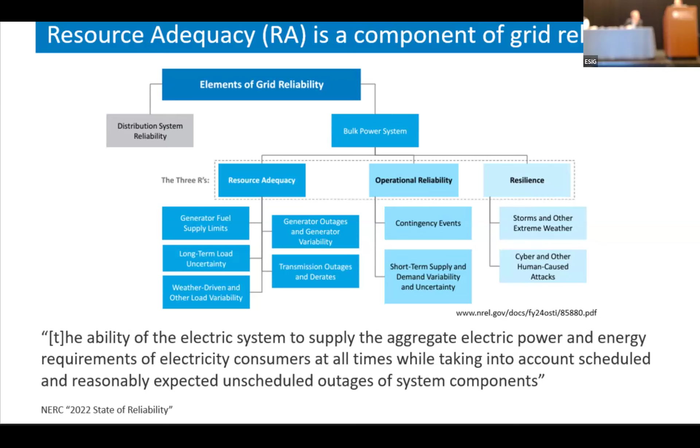So we're talking about resource adequacy. I'm talking about resource adequacy within capacity expansion. I think if you're here, I don't need to go through this. Resource adequacy, obviously an important component of reliability. The key point here is it's the component of reliability that makes the biggest impact, that matters the most within a capacity planning model. I've shown a couple examples here.

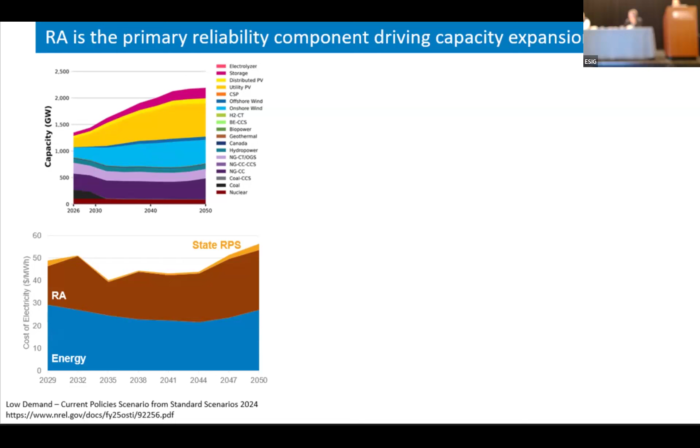But achieving resource adequacy is actually extremely easy. You have a large enough reserve margin, you're resource adequate. But that's not really the challenge. The challenge is that cost reliability trade-off. So how do you have an adequate enough system at lowest cost? That's one of the challenges here that's harder to meet.

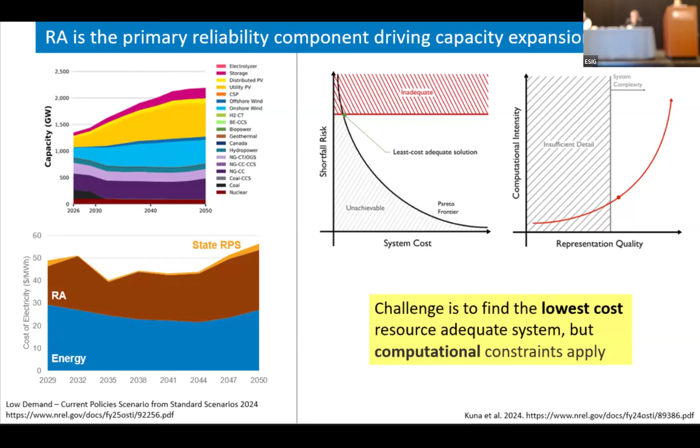The second part is computationally. You can hear from different folks here, I think, that will have their own approaches on how to overcome some of the computational challenges. For us, we're looking at scenarios and modeling for nation scale, multi-region, interconnection-wide. So some of those computational challenges definitely come up here, and we have to figure out ways to overcome them.

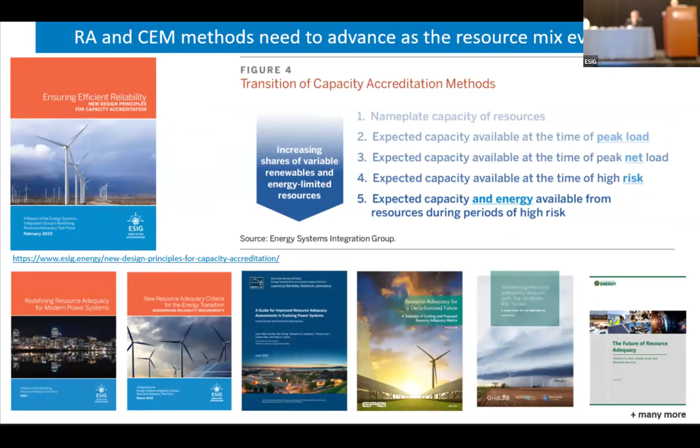As Josh alluded to, many folks have thought about this. Many folks have looked at the resource mix changing, and all these studies from the ESIG task force, from Berkeley Lab, from DOE, EPRI, et cetera. Many folks from this panel are listed here, and many other studies that I haven't shown here are starting to look at this problem. For us, what is the motivation beyond looking at that literature is, how have we done this before, and is it good enough?

And how we've done it before is a traditional capacity credit, having a reserve margin, stacking up your firm capacity after you do your accreditation to see if you meet your adequacy requirement. But what's wrong with that? What's the problem with that? The first is...

When you do your accreditation, there are other sophisticated ways to improve upon this, but essentially the core of it is it's hard to know where that energy will be delivered during times of system stress. So you don't really know if you're comparing your generation profile with your load profile in region or out of region, because you don't know in a future scenario where that energy will be served.

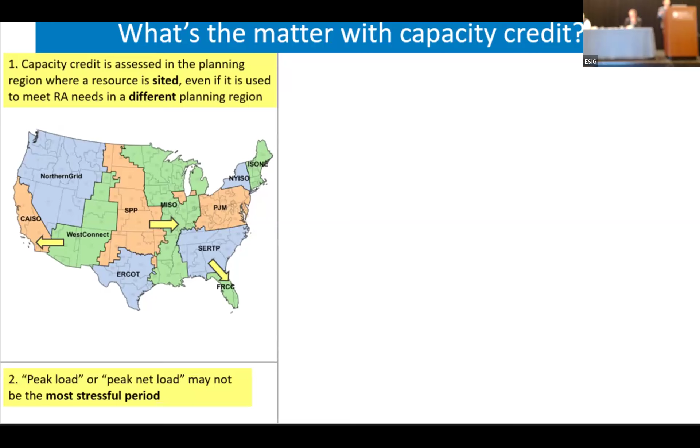Secondly, a lot of these methods use peak load, net peak load, as a proxy for times of system stress. That may not always be the case. It's a good proxy, a reasonable proxy, but it may not always be accurate.

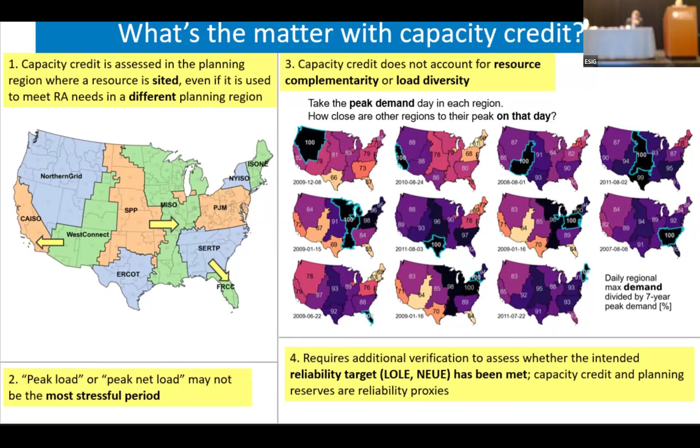And lastly, when you use a reserve margin, that's not directly a reliability target. It's not an LOLE, it's not an expected unserved energy, and therefore you don't really know if you've achieved the adequacy level you intended. Of course you could iterate, change your reserve margin, but in principle, from a capacity planning perspective, the models typically don't have those iterations, so you don't really know for sure.

So what are we proposing here, given those limitations of the traditional method? It's a simple process. I'll go through many slides that walk this through, but essentially the idea is to identify the highest stress periods - let's not use those heuristics of peak load or net peak load. Secondly, let's plan for those days.

When I say plan for those days, use the core of your capacity expansion model, which is optimizing across all the resources in region and out of region to meet those stressful periods. And the third one is check to see if you achieve that adequacy or reliability target, and then you could iterate correspondingly. What does that look like in a fancier flow chart here?

There's no more planning reserve constraint, no more 'hot period, this is your peak load, you got to have enough firm capacity to that.' You just have the stress periods in there.

You design your system, you feed that system to the probabilistic resource adequacy suite model, PRAS, that does your Monte Carlo simulation, does the draws of the different thermal plant outages over a multi-year period to estimate your reliability measures - LOLE, LOLP, EUE.

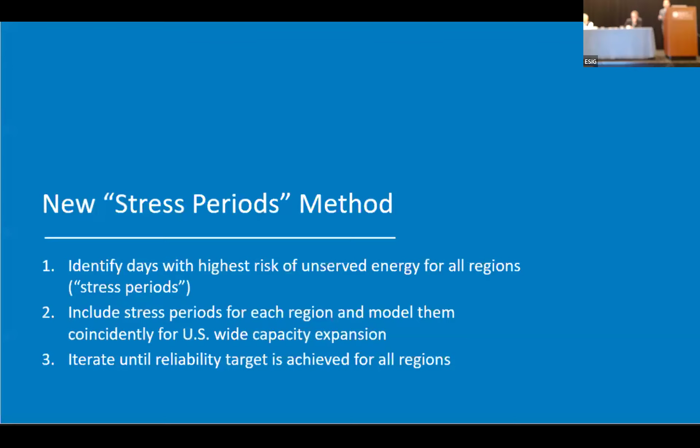Oops, wrong way there - lots of customization.

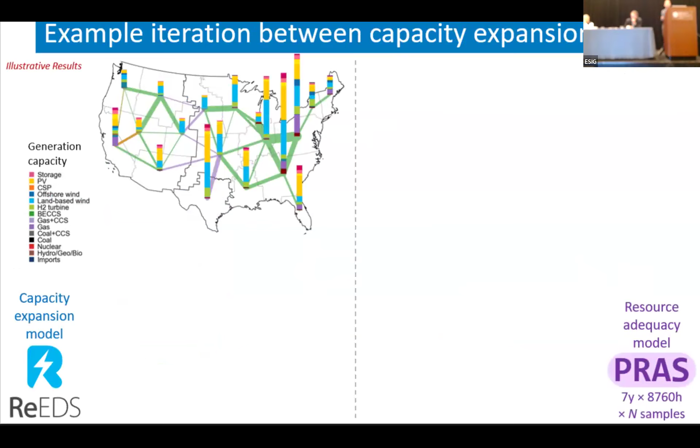So what does that look like? This is the first iteration. You start with your ReEDS, you expand it, you get your capacity.

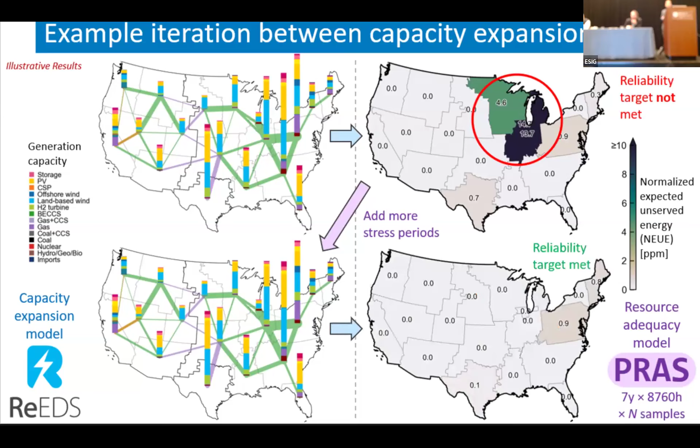You go over to PRAS, you test your reliability target, whether it's met in any particular region. In this particular example, in the northern MISO area, that reliability target was not met. You feed that back in until you find those days with the highest EUE, feed that back into the capacity expansion model, redesign it. Typically that's a light tweak to your portfolio, not a wholesale change of things. Then you test it again. If it's met, you move on. It's a pretty simple process.

Some of the key elements why we believe it's advantageous: you don't know what the sources of stress are a priori. You don't know it depending on your resource mix. A lot of people ask us this when we apply this: how do you know those days are problematic or stressful? In some ways it's totally not satisfying because we shrug our shoulders and say, well, I don't know. But that's kind of the point here, because there are multiple sources of stress.

It could be high demand. It could be changing demand periods over the winter peaks where your solar and your batteries can't resolve the issues. It could be wind droughts, like in this example, multiple days of low wind performance in the Pacific Northwest causing this stress. It could be thermal plant outages, where we model temperature correlated outages, higher outages for nuclear plants during the summer, higher outages for natural gas during the winter, et cetera. It could be a combination of factors, and typically it is a combination working together that's causing that grid stress. As you see in this last panel, the days of stress move over time. The vertical axis is time, and we're really finding those days and planning around them. We don't need a predetermined peak load day to do that.

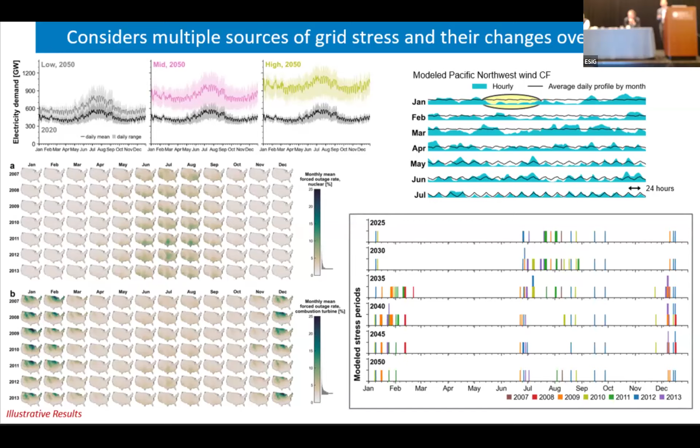Importantly, that's the problem side. What about the solution side? When you put all of this together, the model is used to find all combinations of solutions to meet those stress periods, across all different technologies. So you don't need to assume X% capacity credit for resource Y. It's going to look at the performance of those technologies, dispatch them like any other dispatch, like how you're modeling dispatch normally. That's storage dispatch — it tracks the state of charge, transmission, remote resources. It's all embedded together and optimized together.

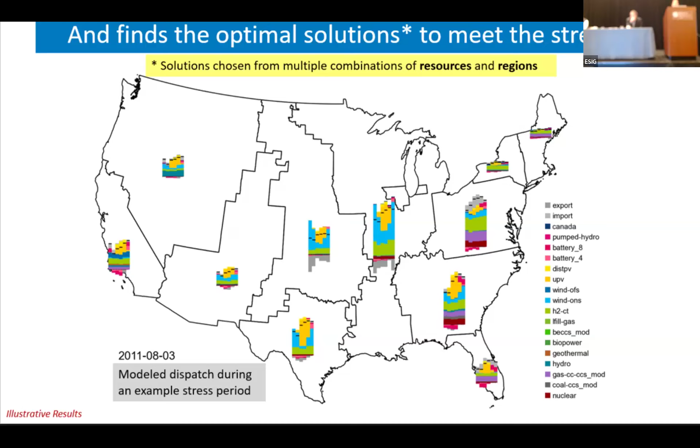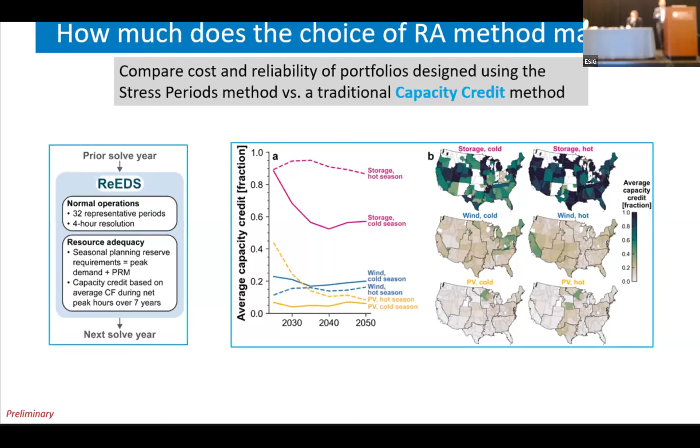Okay, so that's the method. Now we're going to demonstrate, perhaps convincingly, why it matters. We compare what I just described to our traditional method, capacity credit. Just to convince you we didn't cherry pick a poorly formulated capacity credit, you can see some of the lines there with declining capacity credit for wind and solar with increasing generation shares, and capacity credit for storage that's not 100% and declining as well, given the limited duration.

So we have a reasonable representation of capacity credit and planning reserves to compare with. When we model the same scenarios, everything else is the same except for the RA methodology. The capacity credit is in blue, the new stress periods formulation is in red. You get lower system costs by a couple of dollars per megawatt hour, or in another unit, $160 billion in net present value over a 25-year period or so, and you get higher reliability.

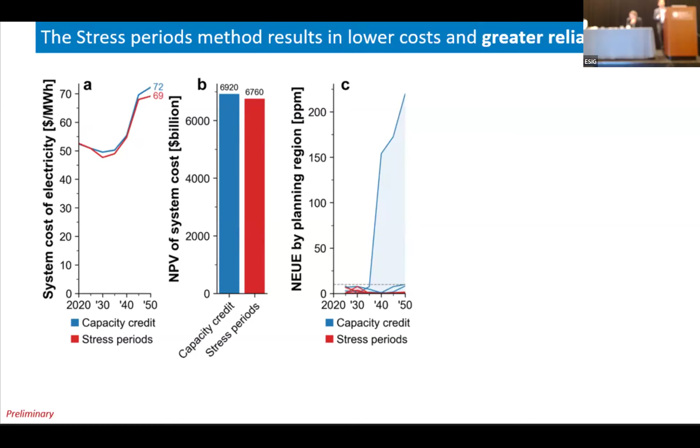This looks at the normalized expected unserved energy. We have a tolerance in our stress period. We don't actually know what the reliability target is in the capacity credit formulation because we did not specify it — it doesn't have a way to specify it. For most regions, in blue, it meets our reliability target, but for certain isolated regions, because we're not exposed to how reliable or unreliable it is, you can have a highly resource inadequate situation, and you wouldn't know it. So it's both lower costs from the stress periods and greater reliability.

And how is this achieved? How is the lower cost achieved? It's by reducing the amount of overbuilds, if you will. There are lots of details in this particular scenario, but we don't need to go into it.

The key thing here is the stack on the right, which is the stress periods, is lower than the stack on the left. So it's a reduction in generation and storage capacity. If you look into the details, most of the reductions are in thermal generation and storage. But in some technologies, you actually get an increase in deployment, so the capacity expansion model sees greater value in that than you otherwise would have.

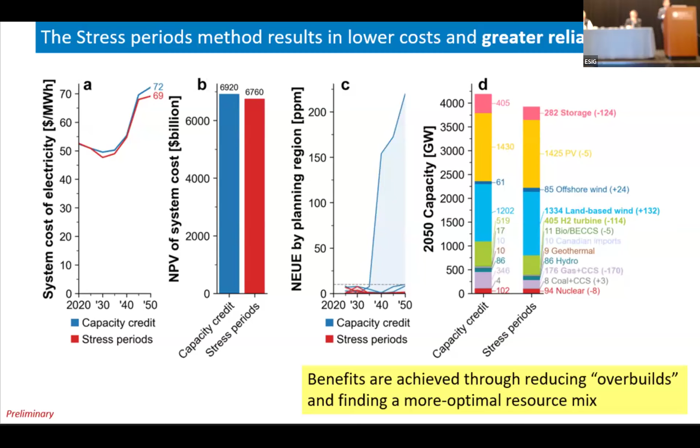That's part of the siting problem I listed earlier, the capacity credit. We misestimated the capacity credit for some resources, in this case wind, for meeting our resource adequacy reserves. And that has a high impact on transmission as well.

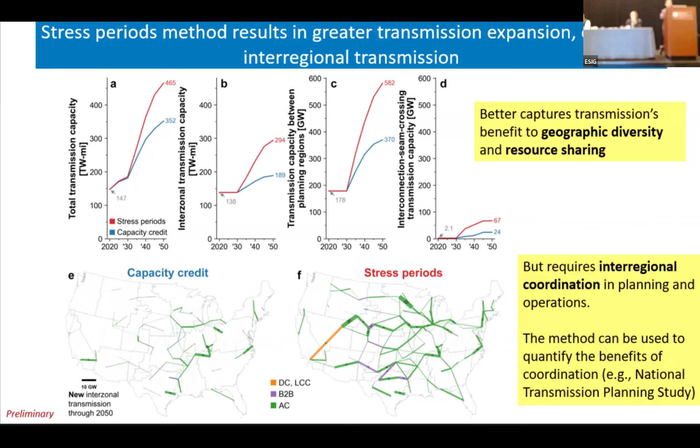Of course, all this requires interregional coordination in both planning and operations to really utilize that transmission. We recognize there are barriers to that as well. So in some ways, what I've shown is an idealized, perfectly coordinated system. You can test different levels of coordination and different levels of impacts, and we've done that in some of our studies, like the National Transmission Planning Study.

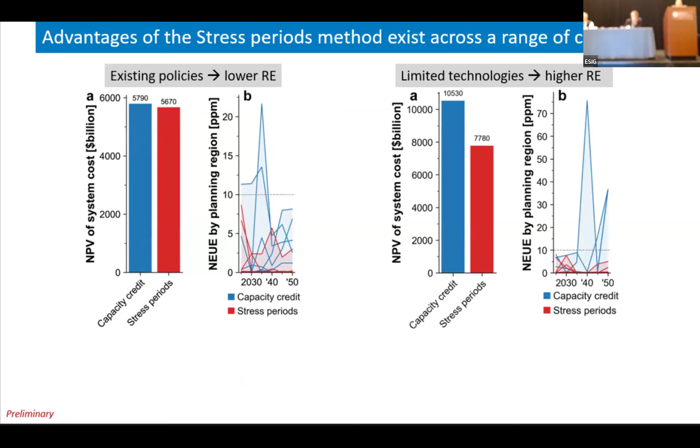You might be saying, wait, did you just cherry pick a scenario in which this method is better? We have tested this over a wide variety, and it's actually very difficult to cherry pick because you're getting lower cost and more reliable systems. It's hard to find a situation in which that wouldn't be the case. In our particular test, we're finding it in scenarios with lower renewable generation shares and higher renewable generation shares, but the gap between blue and red gets larger when you have more reliance on weather-dependent resources, larger systems, and greater interregional coordination. So those are important considerations.

To conclude, I think there are a few bullet points here that I won't read, but one reason we have confidence in this method is because it is so simple conceptually. In the end, you have a reliability target, you're planning to that target, you know that the grid stressful days are the days causing your RA problems. We find those days and plan around them. It bypasses all the proxies you need to estimate capacity credit, and what you might have to assume about generator performance at different time periods. You're just modeling the system directly, and it yields the benefits I spoke to earlier.

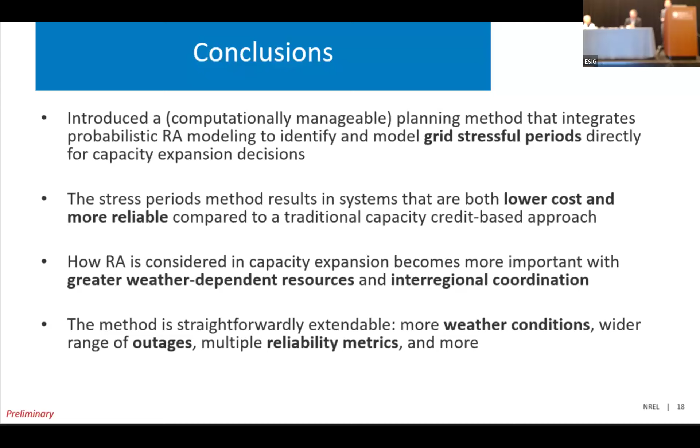Obviously, there are lots of areas for improvement. We could expand the weather conditions, improve our outage modeling. Transmission modeling is always tough, and I think you'll hear from some of our panelists on that. There are also multiple reliability metrics—so far we've implemented this using only EUE as our reliability target. You could have conditions over other targets and iterate over your system as well. And with that, I'll end. Thanks.

Thanks, Trieu. I might just take one moment for a clarifying question from you.

The NPV plots next to the reliability metrics—the NPV does not include any kind of dropped load in that case? That's right. We actually, there was a discussion on the first day about the value of lost load, so we did apply that in some of our tests, and it still shakes out. But yes, that's right—you'd likely see a larger discrepancy between the two as you're getting more reliable in the other case. Great, thank you, Trieu.

We're now going to move on to Russ Philbrick. Russ Philbrick is the CEO and CTO of Polaris Systems Optimization.

Test. Great. Well, that was a great introduction to what I want to talk about, because it gets past one of the biggest barriers, I think, to getting to better methods. Excuse me, I got my notes—I don't speak very often, so I have to lean heavily on making sure I say the things I want to say. Trieu was really getting at the point that capacity reserve margins and resource capacity factors really don't get us what we need in terms of long-term capacity expansion.

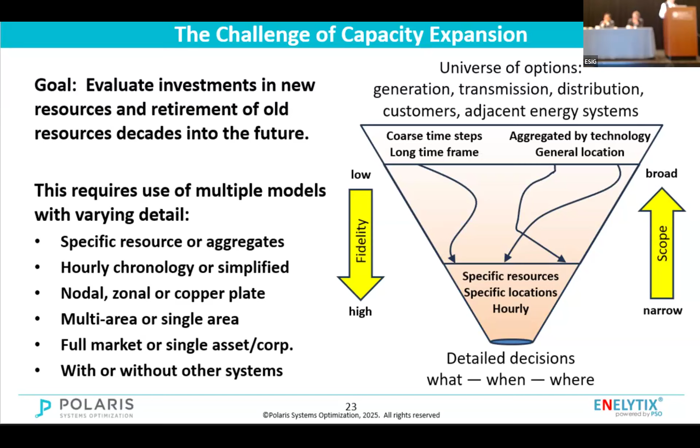Because the problem is so big, we start with simplified models and add details as we reduce the scope of questions. We can think of this as a funnel that starts wide and approximate, and works towards narrowing questions with higher fidelity.

heuristic metrics such as the 1-day-in-10-year standard to determine how much reserves we get. It's not economics based. These heuristic approaches boil down data that's reflected in costs and benefits that could be used to understand flexibility needs of the system and capabilities of resources. In particular, system variability and resource flexibility interact, and we cannot know capacity contributions or effective load carrying capability until after we have solved the capacity expansion problem, effectively what Trieu was saying.

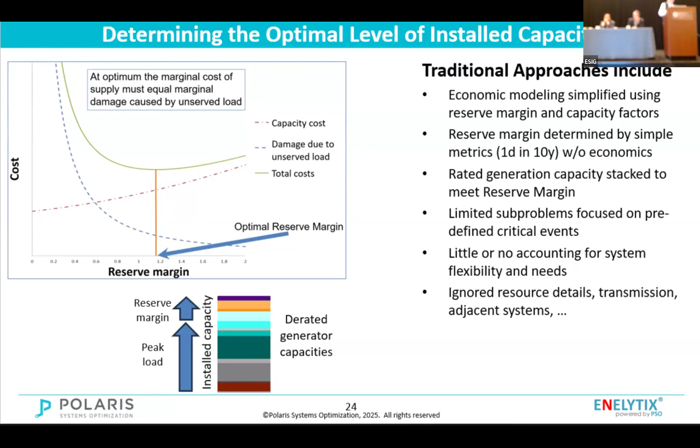So moving on to how we can deal with better, improved performance and get better fidelity in these models. The problem with many of our current capacity expansion processes is that we have an incorrect view of what is and is not possible. Current efforts continue to rely on simplified models of the power system, driven by the assumption that we cannot solve long-term capacity expansion with detailed models.

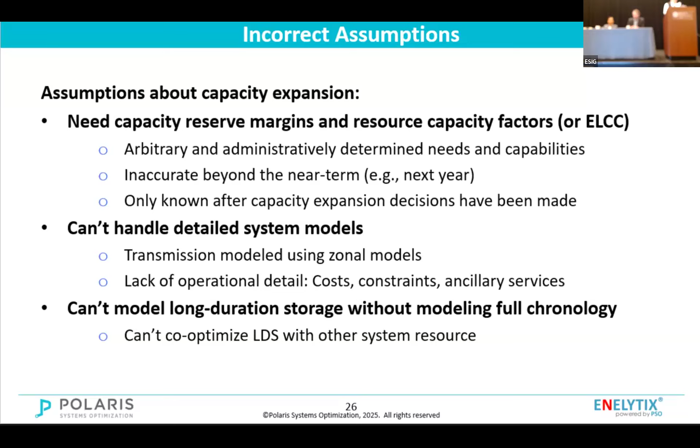Nevertheless, we can. But instead of simplifying system models, this requires that we simplify the chronology to efficiently simulate system variability. Again, Trieu was demonstrating this by using what he referred to as the stress period method. Because of out-of-date assumptions, we continue to use processes... oops, excuse me a second.

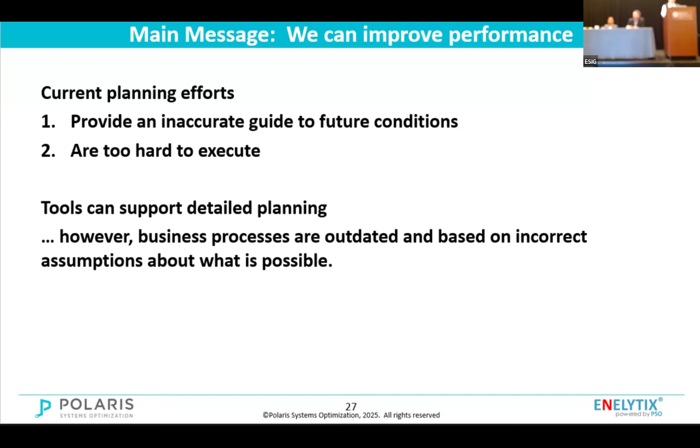Because of out-of-date assumptions, we continue to use processes that are inaccurate and hard. My main message is that we can do much better. We need to do much better. Rapidly changing grid conditions mean that we need to be aggressive in our efforts to adapt planning.

The long model horizon of capacity expansion presents the main challenge. Not only are there many hours in each year, we also need to capture variability of weather seen across different years.

Fortunately, the impact of variability can be adequately captured without this level of detail. Many hours of a year and across multiple years are similar.

Instead, our goal should be to represent variability with a minimum number of scenarios, adding scenarios only when needed to identify the mix of resources needed to manage variability.

Again, stress period method. Currently, the most common approach in the formulation is using representative days or representative weeks. Representative day and week allow us to capture variability over the course of a year and over a range of different years, but without needing to include all hours and all years.

However, even with the simplification, the number of hours can still be large enough that detailed system modeling is difficult, particularly when including power flow. Solving power flow for a large number of hours can explode computational effort and memory.

However, we do have additional choices, allowing us to further reduce the number of system states included in a model.

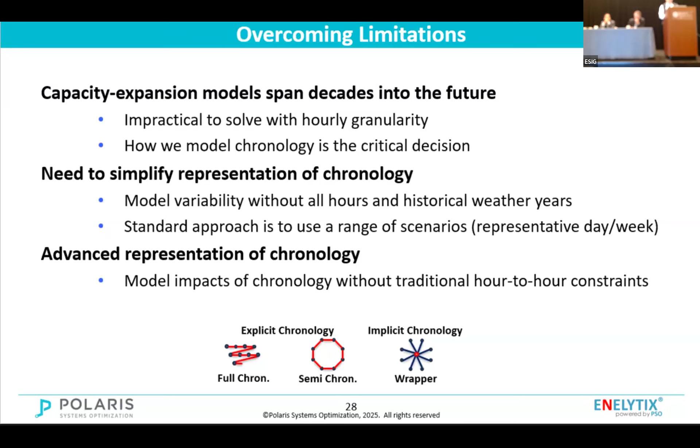As an example of this, EPRI recently demonstrated the benefits of an alternative representation of chronology to enable storage state of charge management by market operators. Efficient and broad participation of storage in power markets cannot be achieved without some form of state of charge management.

However, there is broad concern that if markets attempt to optimize state of charge, participation by more than a modest number of storage resources could become computationally impractical.

Nevertheless, by modeling state of charge using a simplified model of chronology, we can replace traditional daisy chain state of charge constraints with constraints that are much easier for optimization, and we refer to this as the wrapper formulation. EPRI applied wrapper constraints to day-ahead storage operations, but this formulation has an even bigger impact on capacity expansion.

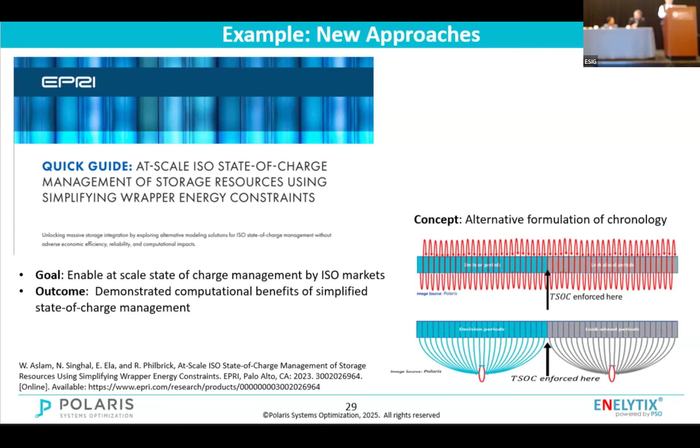Our customers have been using this formulation now for over half a decade, and their work has shown that capacity expansion can be solved in much greater detail. In particular, nodal power flow models are practical.

This avoids significant challenges imposed by using zonal models, justification for the use of which is rooted in history, where utilities often had sufficient transmission capacity within their own footprint, and impacts of transmission constraints were limited to interconnections with neighbors. However, in today's integrated network, transmission constraints exist throughout the system, and zonal representations struggle to adequately model changing patterns of congestion.

Nevertheless, we persist in applying zonal models, resulting in many of the challenges at the front end of integrated planning. We need to define zones that represent changing patterns of congestion. We need to define limits on interchanges between those zones. We need to translate zonal results to provide nodal inputs to other models. And finally, we need both data and people to feed and drive this process.

By using nodal capacity expansion models, all these challenges can be significantly reduced. In the next few slides, I'll present a couple of publicly available examples showing that nodal models are practical and are already in regular use.

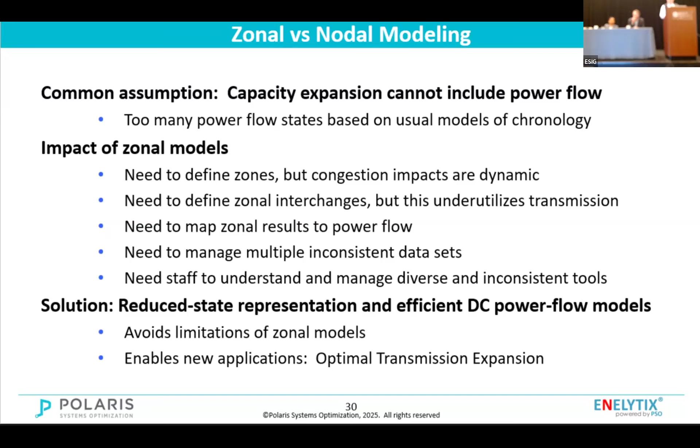The first example is of work continuing to be done by National Grid, but this was first presented at FERC four years ago. In this example, it shows that nodal capacity expansion is practical, but also it shows that nodal capacity expansion has important additional benefits in integrated generation and transmission planning. National Grid continues to use this in their ongoing long-term planning processes to address policy requirements in the Northeast for electrification and decarbonization.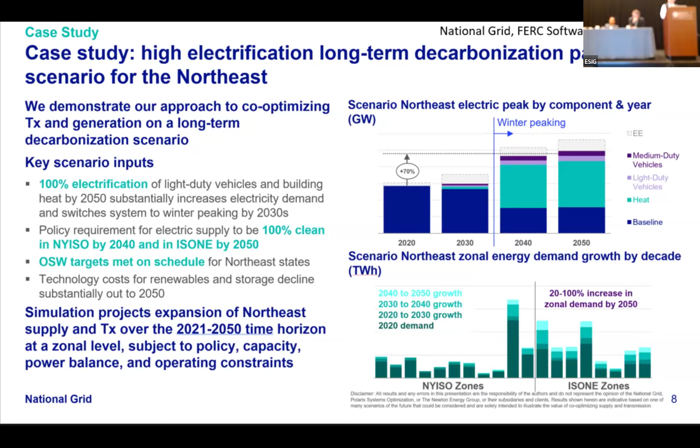To demonstrate the value of integrated planning, National Grid evaluated the generation expansion that resulted from three different transmission scenarios: the copper sheet with no transmission constraints, shown on the left; existing transmission system with no expansion, shown here in the middle; and co-optimized transmission and generation expansion, shown on the right, where new transmission can be installed.

Note that the third scenario integrates not just generation and transmission expansion, but also allows optimal selection of transmission projects from among a range of potential projects, recognizing that any one project is likely to require additional investments due to impacts on other facilities.

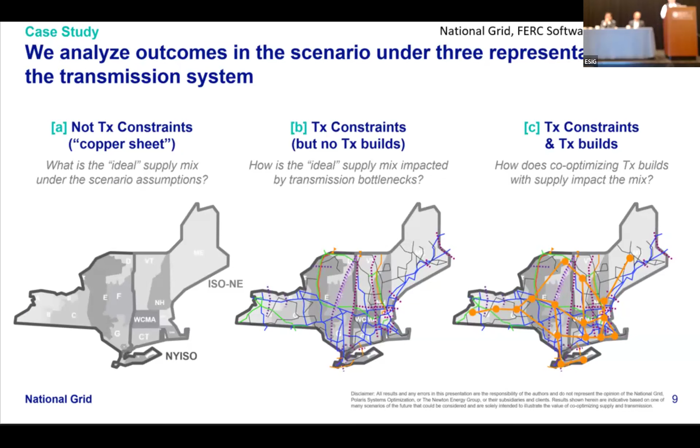These three plots show the results of the three scenarios. The first shows the future mix of generation and storage resources required to meet policy goals if we ignore power flow constraints. The second shows changing mix of resources and additional capacity needed if we enforce existing transmission constraints.

Significant additional investments required that we miss. The third shows the changing mix if new transmission can also be built. So instead of having to build all this new capacity, we only need this additional capacity to handle the transmission constraints of the system, because we've allowed the transmission system to adapt to the new resources that are being built.

So let's focus on some of the differences between these scenarios. Comparing generation identified by the copper sheet and existing transmission scenarios, we see a significant increase in generation capacity and also a change in the mix of resources.

Though a zonal model might capture some of these impacts, it is nearly impossible to adapt zones to changing congestion patterns over each year and in future years. Also, the efforts to define interchange between zones significantly underutilizes the transmission system or risks producing infeasible outcomes.

Comparing nodal scenarios with and without transmission, we see that new transmission significantly decreases the need for new generation. This demonstrates the significant value that integrated generation and transmission planning can have on system costs. This also opens opportunities to improve efficiency of transmission planning.

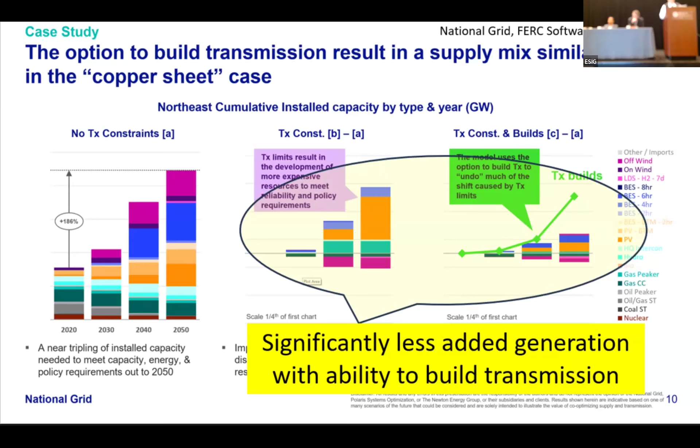A second, more recent example is work by TCR that highlights the benefits of transmission expansion to enable New England to access Hydro-Quebec storage. In this study, TCR combined a nodal capacity expansion model with a long-term storage rationing model and a detailed energy and ancillary services model.

This example and other detailed real-world studies begin to show us that capacity expansion models need not depend on heuristic constraints using capacity reserve margins and resource capacity factors. Instead, capacity expansion can select resources based on their ability to efficiently meet system needs across a range of scenarios, including extreme events.

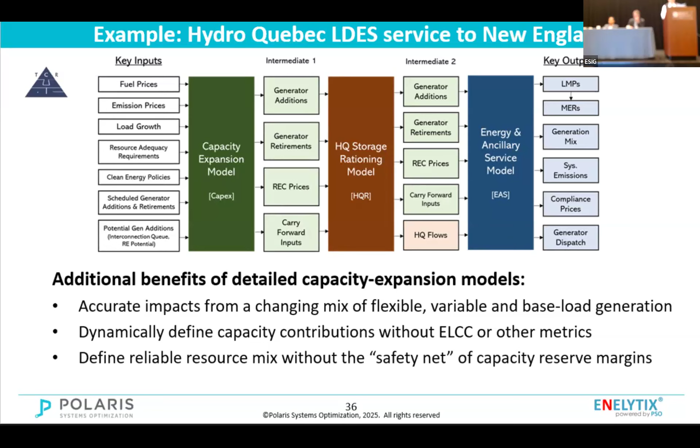Also, because results are not driven by capacity reserve margins and capacity factors, we avoid all iterative efforts to estimate, apply, and test whether we have used the correct values.

Though I have shown that detailed capacity expansion and nodal models are practical and in regular use, there is still more work to be done. There are a range of issues that need to be addressed.

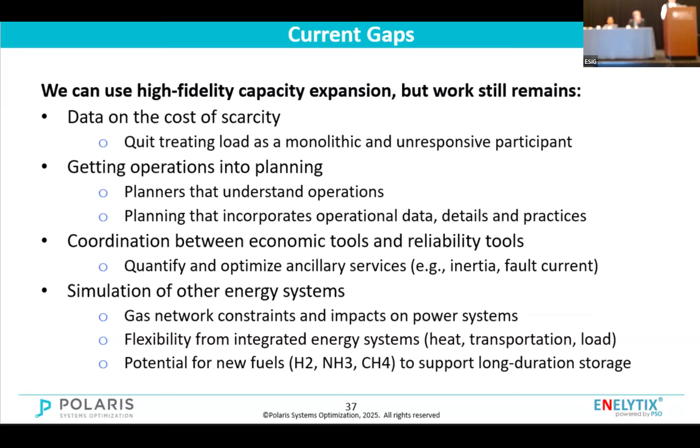How do we understand the value of load flexibility? How do we change planning processes to capture the impacts of operations? How do we bridge the gap between economic and reliability studies? How do we understand the interaction of power systems with other energy systems? There are no technical barriers to addressing these issues, but there is a lack of process to move them forward.

In summary, then, I hope I've demonstrated to you that existing planning models are unnecessarily simplified, and that these simplifications result in models that are both less accurate and contribute to making integrated planning hard. However, with appropriate simplifications of chronology, many other system details can be included, allowing us to understand the impacts of variability and the value of flexibility from all sources.

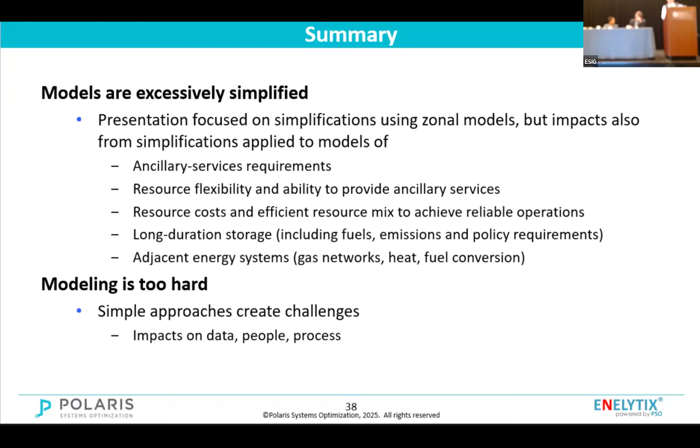As a final note, we also need to recognize that even if technical barriers are not hard, it still is hard to change processes and to help people adapt. And this is where our main challenges lie. Thank you.

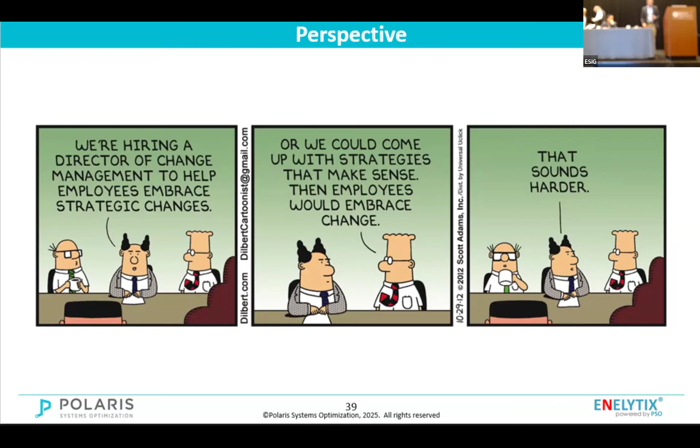Thanks, Josh. Coming through the mic. Great.

Appreciate that. Josh introduced me still as the president of Astrape. I'm still getting used to my new title. I was the founder and president of Astrape Consulting for the last 20 years. I founded Astrape in 2005. I'm now the chief product officer for PowerGem. We were purchased by PowerGem, merged with PowerGem in the spring of last year.

So it's a little bit bittersweet for me because Astrape was my baby for 20 years, but I'm excited about some of the things that we're going to be doing with PowerGem moving forward, and kind of my role as trying to lean into the synergies that we have between zonal and nodal tools.

I want to start off just by echoing or confirming a lot of the things that Trieu and Russ have found, that certainly we agree capacity expansion should not be done with planning reserve margins as an input, ELCCs as an input, that capacity expansion should do endogenous calculation of reliability. We've worked forward and others around the room on this over the years, and that's kind of a key attribute of our capacity expansion modeling in SERVM.

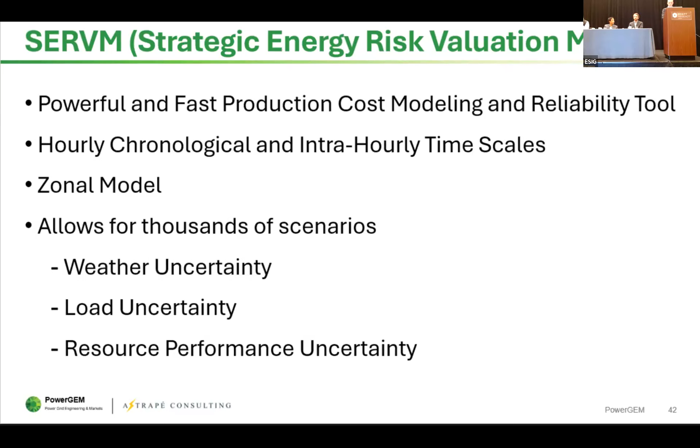Our footprint covers most of the country. These are just the ISO, RTO, reliability entities. We will be performing interconnection-wide studies with WECC and with all the Eastern interconnection EROs this year to understand wide-scale reliability implications of the current system. Obviously, we have a lot of utilities and ISOs, so some of the blank regions, SRP, see here today, and PNM and APS, other entities in the Southwest, are also clients. So we cover most of the country.

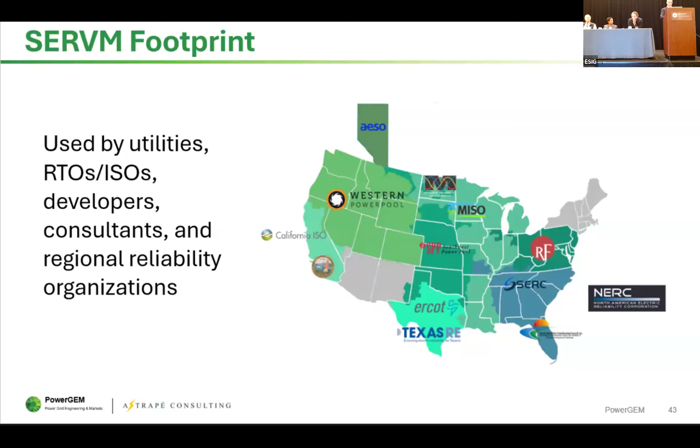Most of the country uses SERVM for a lot of their resource adequacy modeling.

One particular implementation we've done a lot of work with recently, and we've got 5 or 6 of these engagements currently ongoing, is understanding the interregional value of transmission projects. So doing both nodal assessments on the front end, and zonal assessments to understand, if I build this big transmission line between SPP and MISO, what is the expected reliability contribution? Derek's done a lot of work in this space as well, but recognizing that diversity between 2 zones could mean that 1,000 megawatts of increased transfer capability could correspond to 2,000 megawatts of ELCC value if there's a lot of diversity between particular zones. So we're doing that work on behalf of a number of entities across the country.

Here's an example that we did for Grid United to understand North Plains Connector, the value of that resource.

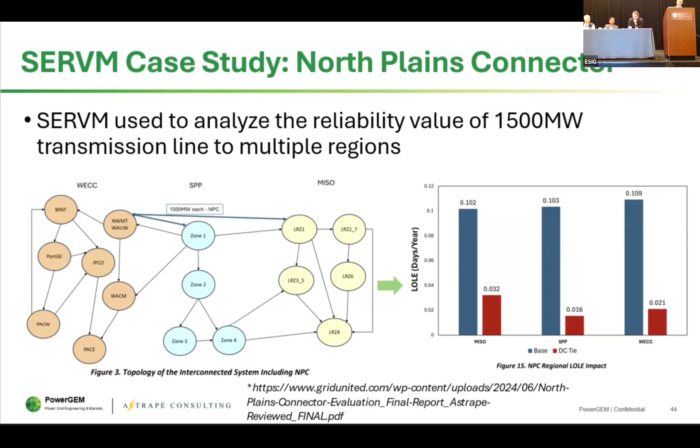All right, so the feedback loops from TARA into SERVM. Clustering functionality is a project we're working on currently where we are trying to map the Texas system on a zonal basis, but a zonal basis that doesn't respect the regional or ownership or geographical differences. It's really about understanding electrical proximity.

So in TARA, we run analysis to understand the impact of buses and generators across flow gates, and grouping those according to similar distribution factor values gives us a better mapping of zones. So we end up with 10, 15 different zones within Texas to better represent those transfer limits for modeling in SERVM.

So again, the goal of this is better representation of zones by electrical proximity, and better representation of zonal constraints. Using TARA also allows us to consider not just peak summer and peak winter conditions, but other conditions as well to understand the capability. Ultimately, with that better information, we can calculate better zonal ELCCs and planning reserve margins.

We've done some work on this in the past with Aiden at EPRI, with ERCOT before. We took particular scenarios, we looked at the transfer limits, and we've seen that there is an impact on the planning reserve margin, for instance.

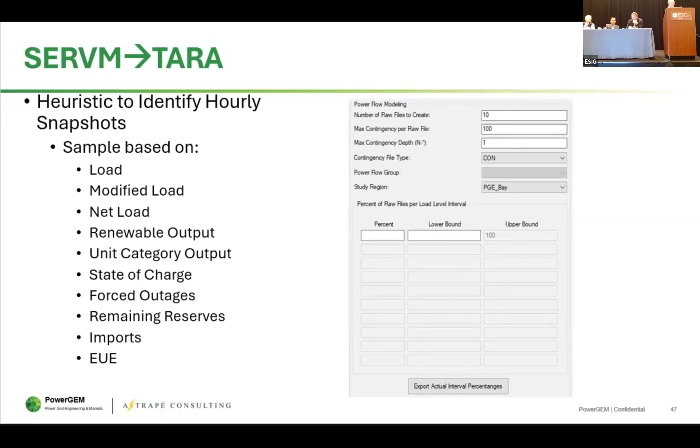We expect that there will be different heuristics we'll have to use to get convergent reliability results. But at the highest net load, we'd expect both from a resource adequacy standpoint and a transmission adequacy standpoint, those are probably going to be the most difficult time periods to satisfy. The low net load periods, perhaps different issues are surfaced, but if we can define a regression from moderate net load conditions to the most extreme net load conditions, this is the regression of additional expected unserved energy. We can get an expected value, the incremental transmission-related reliability problems, and then ultimately plan to a particular composite reliability metric standpoint.

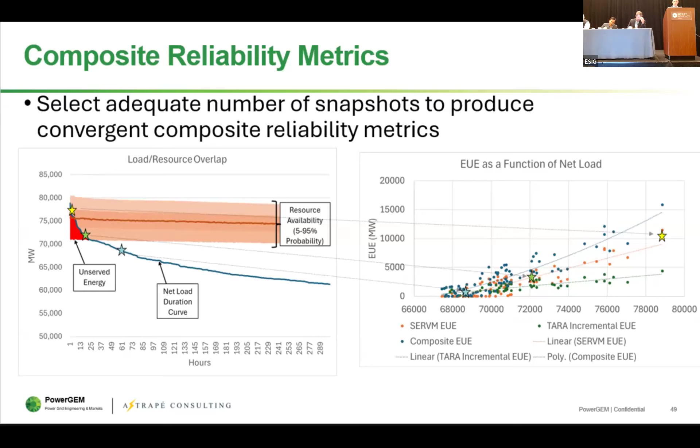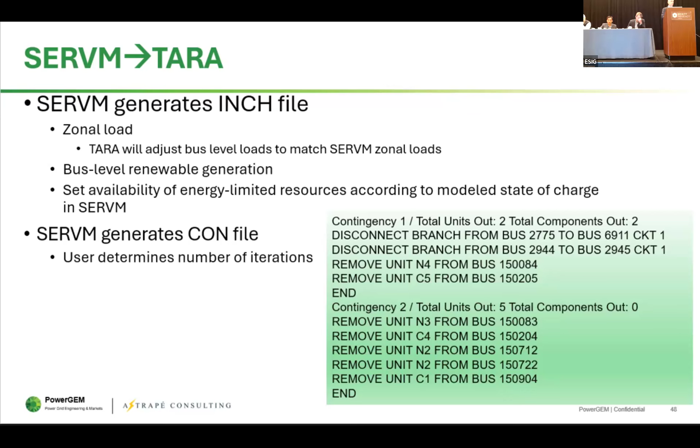To skip one slide, in our models, our expectation is that for the long term we will have the need for both zonal and nodal models, and our goal is to build the tools within the tools to make the models talk to each other. So we've got buttons in SERVM to create TARA input files, and the same thing for TARA to create these zonal import limits in SERVM, and so forth.

So I kind of hit on this already, but it's taking that regression I showed on the last slide and layering that in. The expected value of composite reliability, instead of 1 day in 10, maybe a system that's 1 day in 10 on a zonal model compliant, maybe it's 1 day in 5 on a nodal plus zonal model assessment area. Nobody's defined what the correct reliability standard is yet, but ultimately understanding how you translate N-1 secure into expected reliability metrics for the consumer.

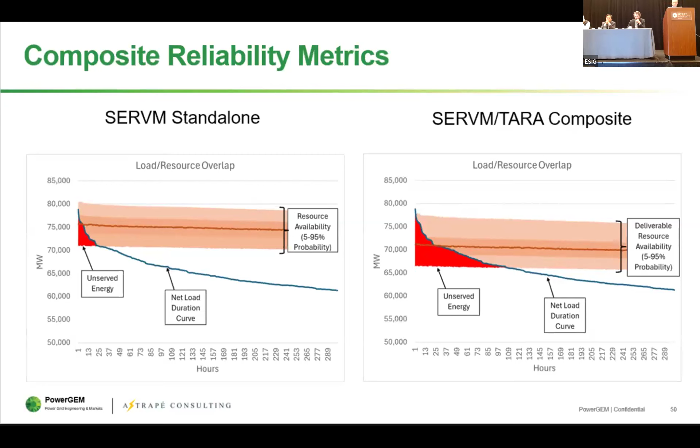So again, the goal is solving for 1 day in 10 LOLE, or whatever the reliability standard may be. They have passed a new reliability standard that takes into account duration and depth of reliability events. So solving for whatever the reliability standard is while also respecting all the nodal constraints.

And again, just reemphasizing that we think it takes a lot of simulations. In the capacity expansion exercise, there are so many asymmetries in weather conditions and generator performance that ultimately running an expected case won't allow you to identify the optimal solution. There's typically some asymmetry, meaning it's at the 70th or 80th percentile of the distribution of weather outcomes that drives the need for resources. So ultimately, we see the need for combinations of tools, and that's what we intend to supply to the market.

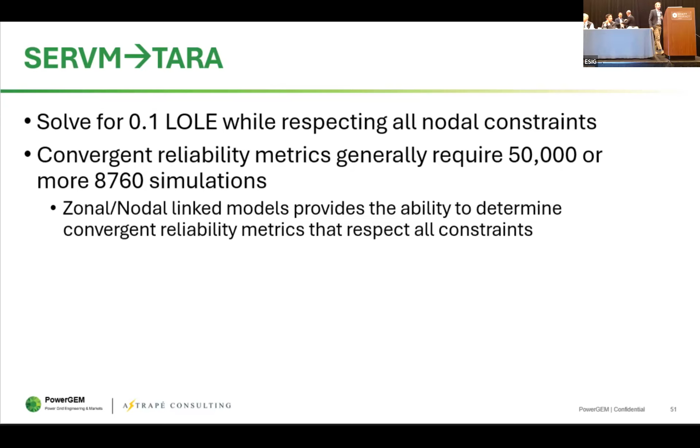Thank you, Josh. Thank you to all the folks on the panel for really teeing up this discussion well. You heard three disparate approaches, but fundamentally a lot of the same problems.

So I think there's a lot of commonality around everybody agreeing on some of the limitations we have in the process and the tools we have today. I'm going to agree with all of you on the challenges, and there are a lot of really interesting ways to approach them. I'm going to add maybe a fourth option to resolving some of those challenges when we think about planning out the system with a lot of uncertainty and a lot of other priorities that aren't just cost.

When we think of capacity expansion modeling, most of that is cost optimization, and we try to come up with the lowest cost portfolio of resources. The reality is there's a lot of other things that go into our decision-making than just cost. We talked a little bit about the reliability trade-off, but you can think of trade-offs with emissions, land use, and just preferences around technologies and resource types.

So we really wanted to take a step back and look at how do we better manage all of this uncertainty while also tackling some of the fundamental challenges we see in capacity expansion modeling.

So this is some work we did with GridLab. I'll point you to three white papers that came out together. The first talked about a lot of the fundamentals of the capacity expansion challenges, written by Nick Papas. The second was around this iteration between capacity expansion and directly embedding the resource adequacy constraints, very much in line with Trieu's approach, and that was written by Elaine Hart. She was supposed to be on the panel, so I'll have a short plug here at the end to cover her stuff. The third piece of that series was the work we did around what we call an alternative approach to portfolio design and capacity expansion.

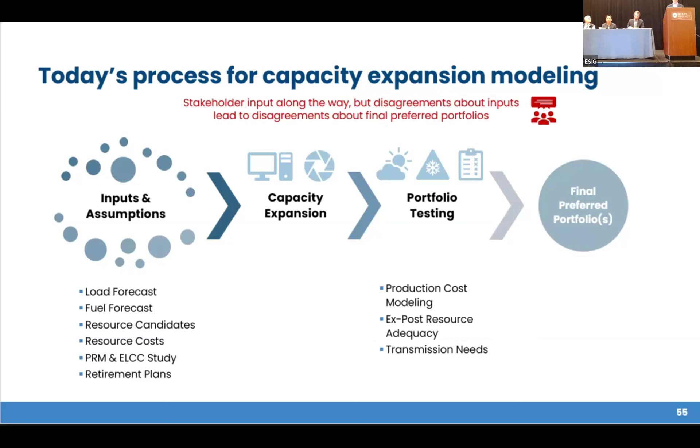The problem we see with that process is there's increasingly stakeholder engagement, a lot of work being done to improve the inputs and assumptions. And so this process gets to be fairly long.

And by the time we get to that final step in the process, all of our inputs and assumptions have changed. One of the quotes that came out, I forget on which panel yesterday, is like, we do a pretty good job on the inputs and assumptions, but we know all of them are wrong. And that's just the reality of it.

Especially when we have an 18, 24-month process, by the time we finish, the inputs have changed. I know a lot of you can relate to this. You've gone through and done a whole study, and then you get to the end and the IRA comes out. Now we have tax credits we didn't know about, or the capital cost of a combustion turbine is twice the price of what it was 12 months ago. So you can all relate to this.

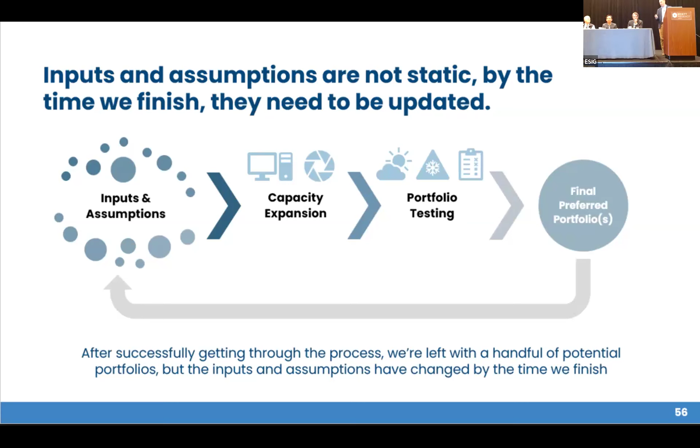So what's an alternative? The way we're thinking about this—we've tested it out, piloted it, and we're developing some tools to facilitate it—essentially, let's take some of the uncertainty around the inputs and assumptions and move it to the back end of that process, making it very flexible so we can adjust the inputs and assumptions on the back end rather than using it to seed the capacity expansion.

I think this can be faster and more transparent for stakeholders. It can help bring in multiple objectives, not just cost minimization. It can really help with some of the uncertainty. And lastly, it can be a lot more accessible to the non-modeling community.

This room is collectively kind of experts in the modeling community, but when we're working with stakeholders and regulators and folks that aren't in the models, I think a lot of times the capacity expansion model can be a bit of a black box where they just get 'here's the answer, take it or leave it.' I think this can be a little bit more adaptive.

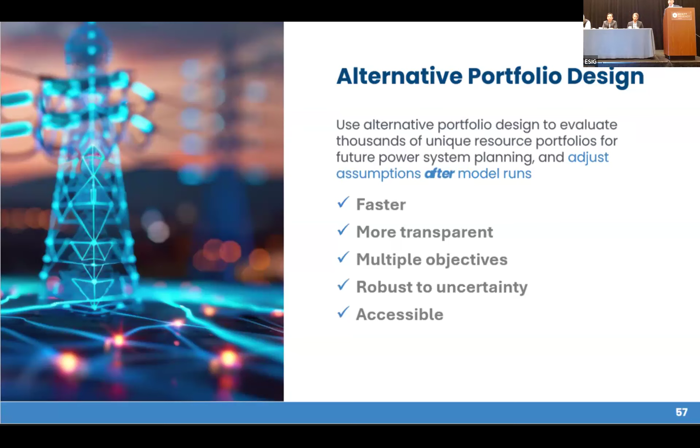So what is the process? Really quickly, I'll walk through an example. The first step is to select a baseline set of model years. One piece of this is we're not trying to do an entire 20, 30-year capacity expansion of every point in time—we're taking a few select years.

A lot of you can agree that oftentimes when we do the capacity expansion model, there's a few select years we're really interested in: when are plant retirements happening, when are emission constraints coming in, and when are there policy targets we need to plan to. The idea is this process, you could interpolate between them.

Then we identify new resource and specific retirement candidates—we come up with a list of what options we want to include or exclude from the analysis. Step 3 is where we kind of deviate from the standard process.

So instead of coming up with one optimal solution, we develop hundreds or potentially thousands of unique portfolios. We could either randomly select those or come up with some heuristics of how to sample them, but essentially come up with a set of many hundreds or thousands of unique portfolios rather than one optimal.

And then we'll run each of those through an 8760 hourly production cost simulation across multiple weather years, so we can get the specific unit commitment dispatch of the system and not do any of the simplification approaches that Russ was saying we can and should move away from. So kind of going to more of a production cost framework.

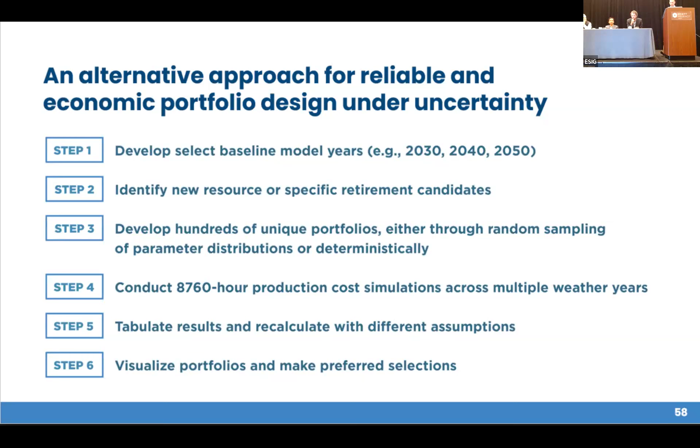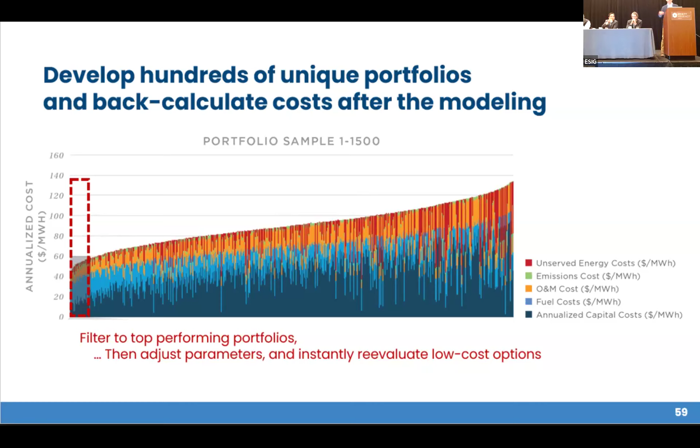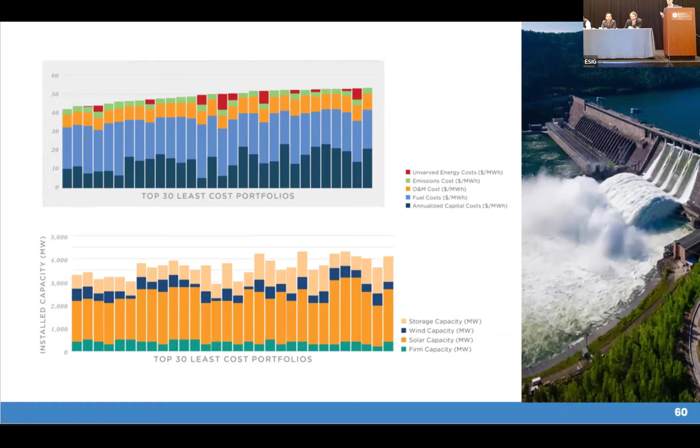In case it wasn't clear, the tool and process we've set up takes the fuel costs, capital costs of the equipment, all of those properties that are typically inputs, and we are now post-processing them on the back end of the production cost simulations. So we can adjust the fuel costs and immediately see how this chart or the previous charts might change given that change in fuel price or a change in technology cost.

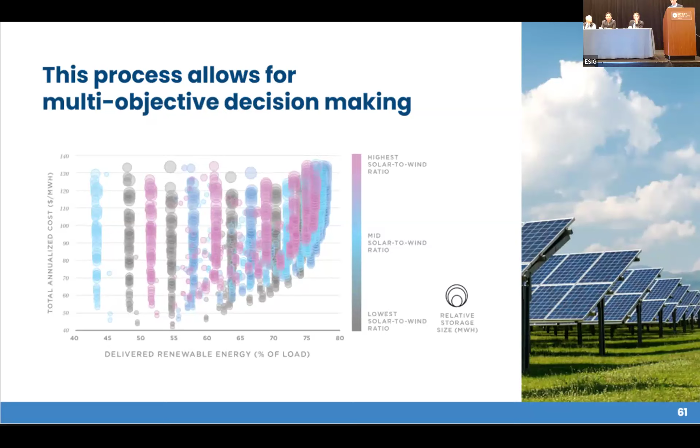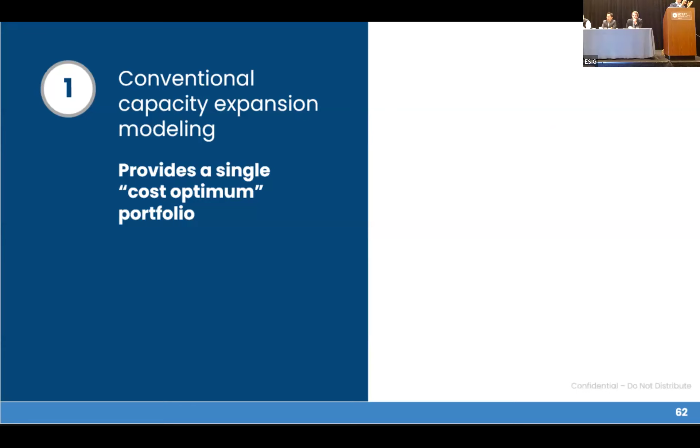So quickly, what are some of the benefits and differences with how conventional capacity expansion modeling is conducted? I walked through most of these, but conventional capacity expansion modeling typically gives you one optimal solution. It says, given all my inputs, here's the single cost-optimal, ideal portfolio.

The alternative to that is we get hundreds or thousands of potential portfolios. We can capture that uncertainty, and importantly, start considering non-cost metrics against each portfolio. So if we have a dozen portfolios that are very similar in cost, maybe land use becomes more important, and that determines the portfolio we want to select. Or maybe some stakeholders don't want offshore wind or hydrogen, and we can filter and exclude portfolios based on technology preferences.

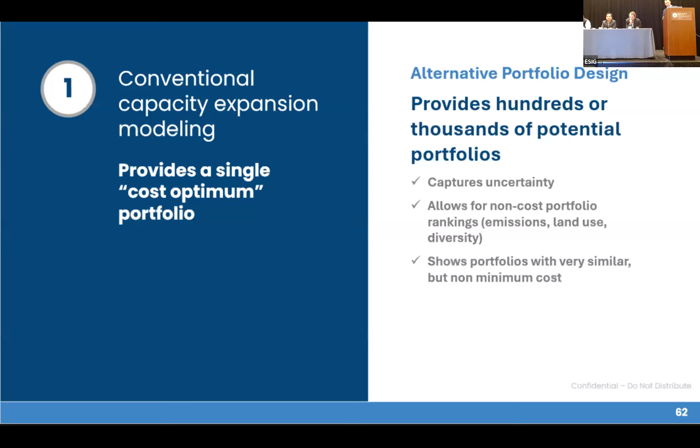Second, conventional capacity expansion modeling involves simplified chronology and transmission and grid operations that have to go into that computation. The alternative here, because we're doing the full 8760 chronological modeling, there's less simplification required. We're doing the full 8760 to better account for variable renewables and storage charge and discharge constraints. And if we want to, we can directly embed transmission into that analysis as well. So a lot more granularity - a similar critique we heard a lot about, with maybe an alternative approach to resolving it.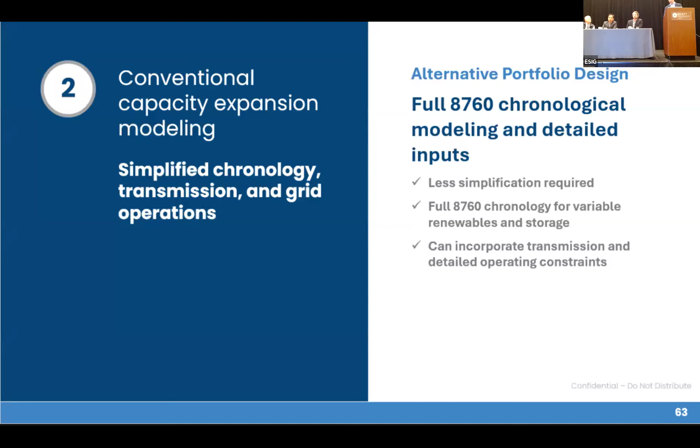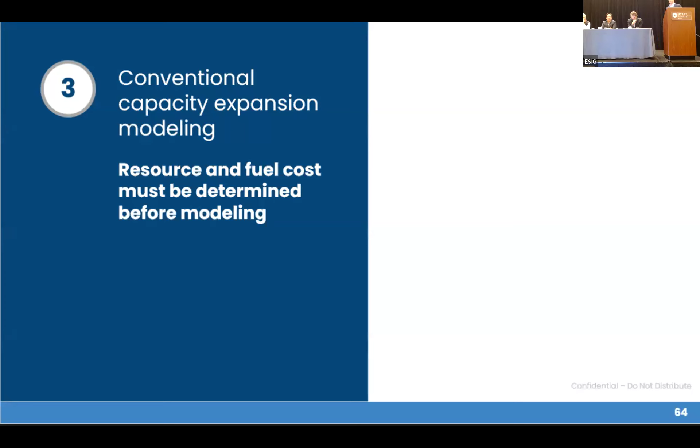Now, an astute observer might say, 'Hey, shouldn't fuel costs change your unit commitment and dispatch?' Absolutely. I would say this isn't taking into account coal versus gas trade-offs between the two - I'd argue that's getting less important in our forward-looking projections. So it assumes the unit commitment and dispatch is based on a specific price, and then we're post-processing changes to that. That allows us to do sensitivity analysis around key assumptions and uncertainty.

We can very quickly, without rerunning the model, say, hey, what would a $20 carbon price do across these different portfolios? We can see that on the back end and very quickly adjust, refilter, resort all of our portfolios. Same with policy changes around the ITC and PTC - if policy changes happen, we don't have to go rerun the model. We can just adjust the CapEx or the price on the back end, resort all of those portfolios. It'll dynamically change the ordering of all of those charts, and we can visualize the results very quickly.

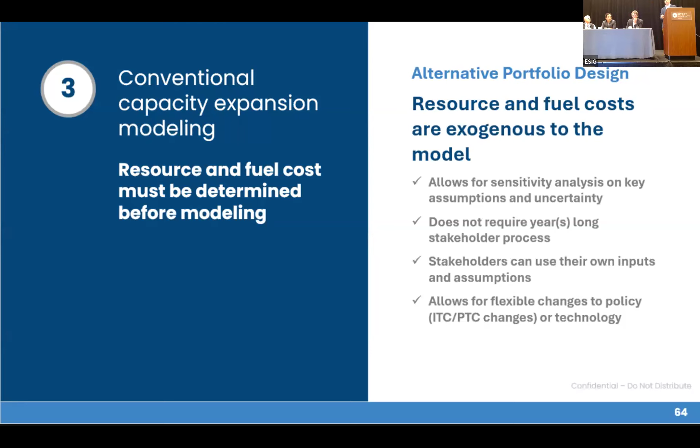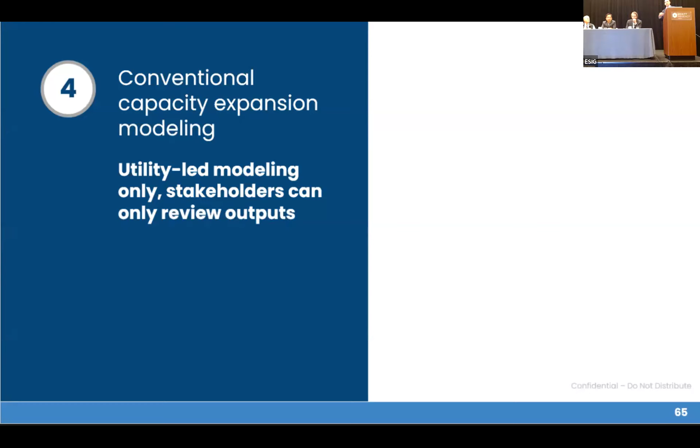Fourth, I think this is probably the most valuable benefit: today, capacity expansion modeling is typically utility-led modeling. Stakeholders are reviewing the inputs, reviewing the outputs, and providing feedback, but they're ultimately, in most cases, not running the models themselves. And to them, it's a black box.

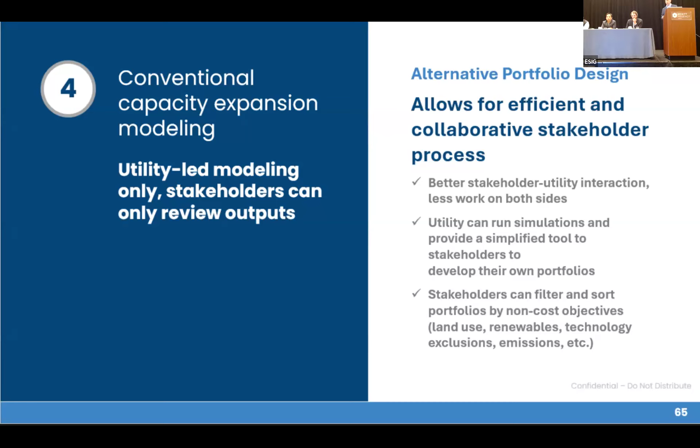The alternative here is, because it creates a dashboard of 1,000 different portfolios, stakeholders can very quickly go in and say, well, I prefer a portfolio that looks like this - how does that rank up against this portfolio? It's not reliant on the utility to provide those to the stakeholders. The stakeholders can go in and do their own filtering, bring in their own factors to decision making.

Fifth, capacity expansion modeling is very computationally challenging. It takes up a lot of resources to come up with an optimum solution - a lot of memory, a lot of RAM. We typically are constrained on compute capability, and that's what's driving a lot of that simplification. This process still has a lot of compute requirement, but it's parallelized computing, not optimization. So we can split the problem into as many parallel 8760 production cost simulations and run that through - it's a lot easier than trying to do that optimization.

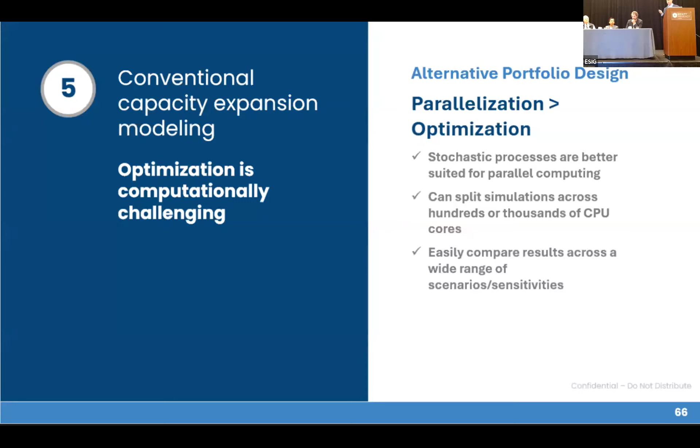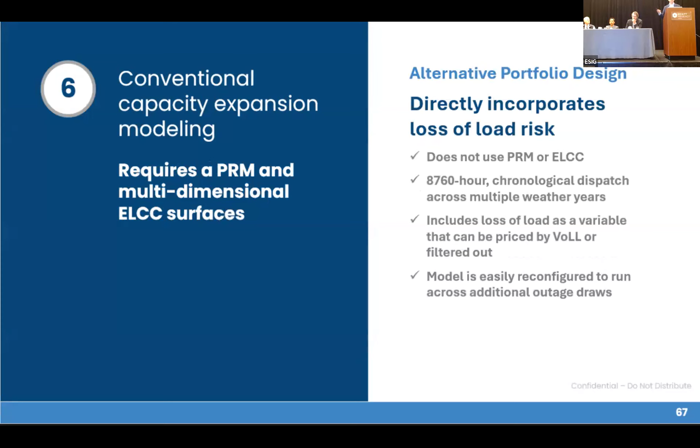And then lastly, a lot of work was done to talk about the PRM and multi-dimensional ELCC surfaces required for conventional capacity expansion modeling. This is a different approach to resolving a similar challenge - how do we directly embed unserved energy and constraints like that into the model.

So with that, I'm going to skip over a couple things. I will say there's a demo - if you go to telos.energy/demo, you can play around with the tool. You can develop your own portfolio, filter things like, I don't want to look at cases with wind, or change the fuel price or the CO2 price. It's, I would say, a pre-beta version of the tool, but something we wanted to give people the ability to tinker around with, and we're very interested to hear your feedback.